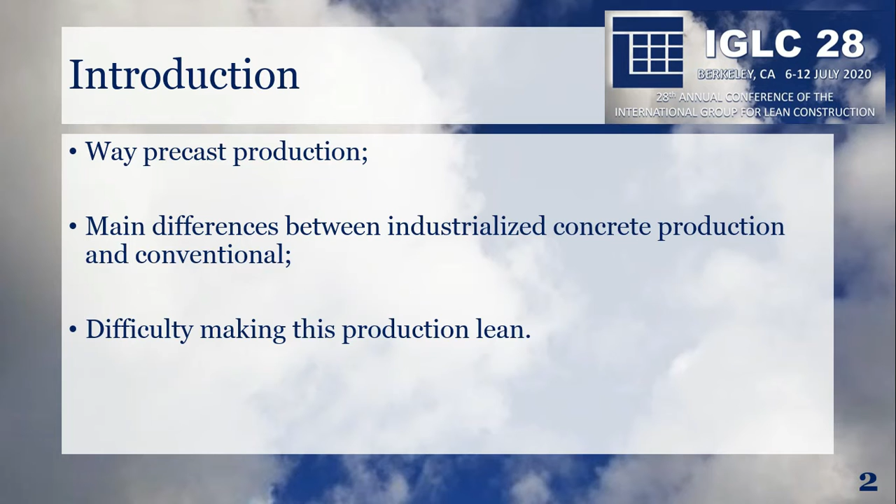This research was carried out as a case study in an industry of precast elements, Factory A, located in the state of São Paulo, Brazil, which has an installed capacity of 5,300 cubic meters. At the time of the research, this factory was producing 4,000 cubic meters distributed in pillars, beams, and strutting beams as structural elements, solid closing panels, and custom parts. This company is characterized by the high adaptation of the types to meet any need for projects.

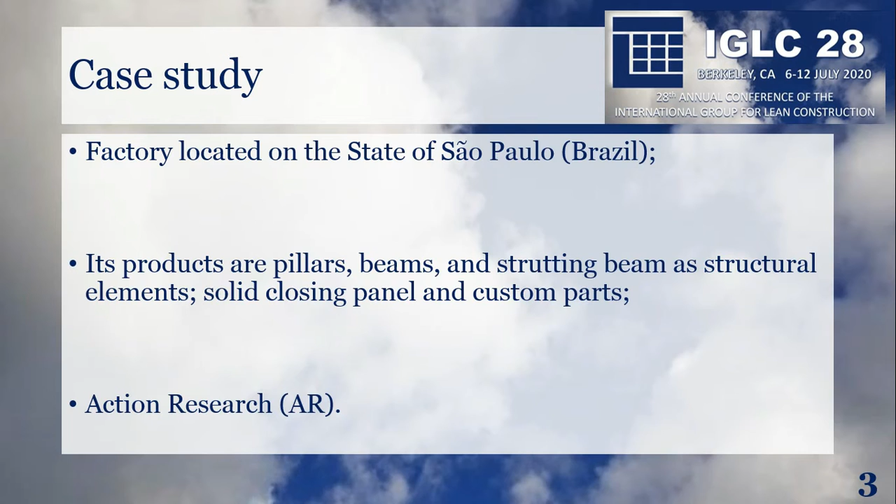Thus, an intervention was carried out through a master's research with an action research methodology, allowing the researchers and also the factory production coordinator to try to improve the process. Initially, it was proposed to study the production of prestressed beams. This production is carried out with a prestressing track.

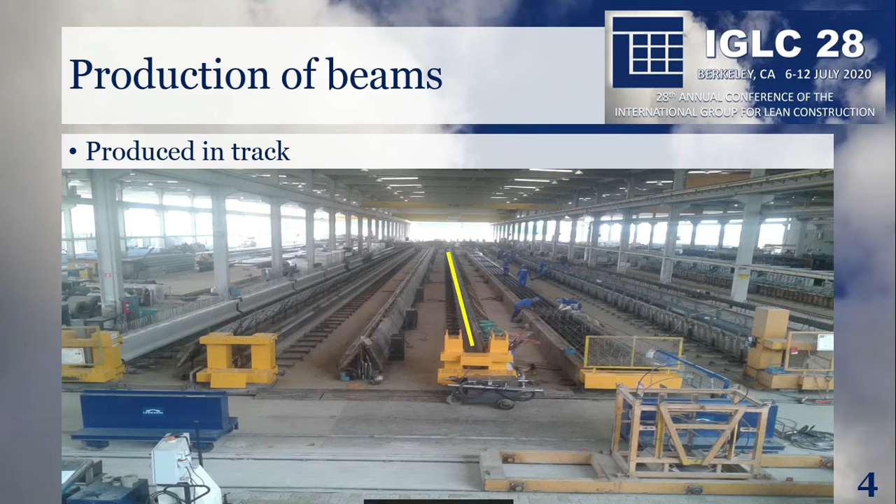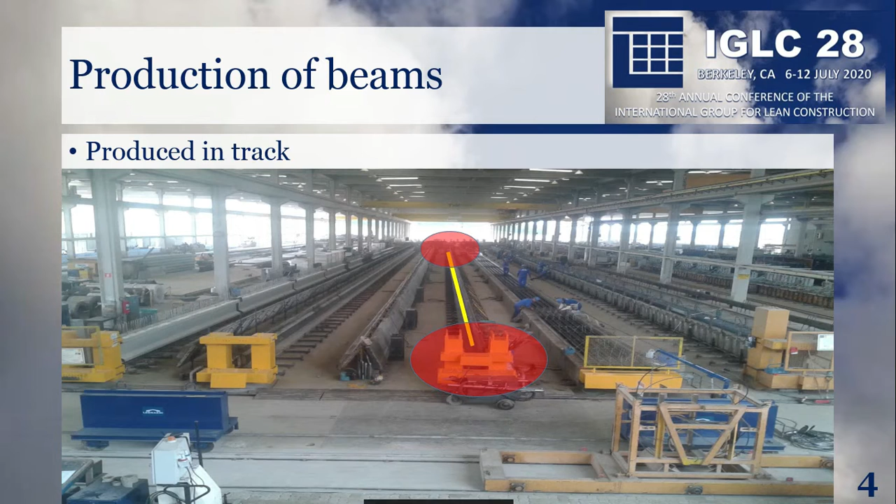This track is a region between two prestressing headboards. As you can see, one headboard in this picture at each line of this production track, and these are the active headboards, while the passive headboards are at the bottom. Between these headboards are the metal molds that serve to shape the beams, as being triple I or as being triple V. When carrying out production, it is necessary to pass the prestressed steel strands along the whole track.

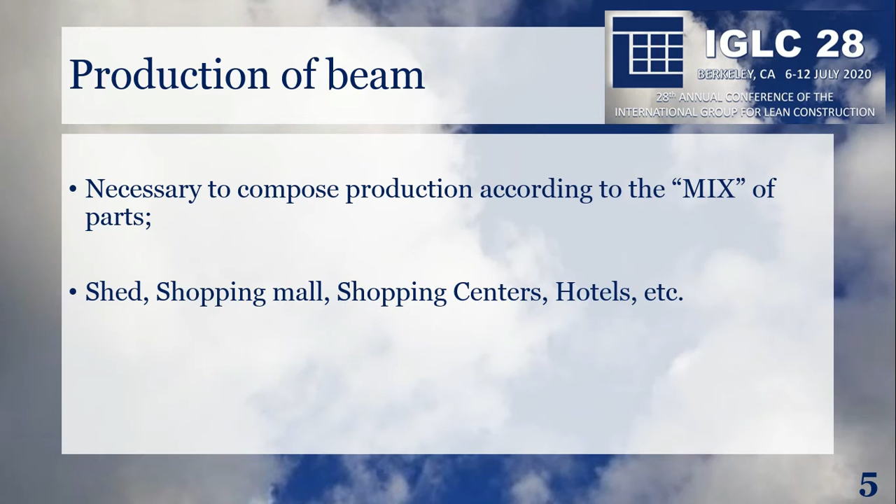Therefore, with the intention of making the best use of available resources, such as prestressed steel strands and the metallic molds, usually several beams are combined in the same track. As the factory builds works of warehouses, hospitals, shopping centers, hotels, and supermarkets using precast elements, the production of a beam in a shopping mall has a totally different complexity than a beam in a warehouse. With several works, it is necessary to produce according to the available mix. This mix varies with sales and generally interferes with workloads.

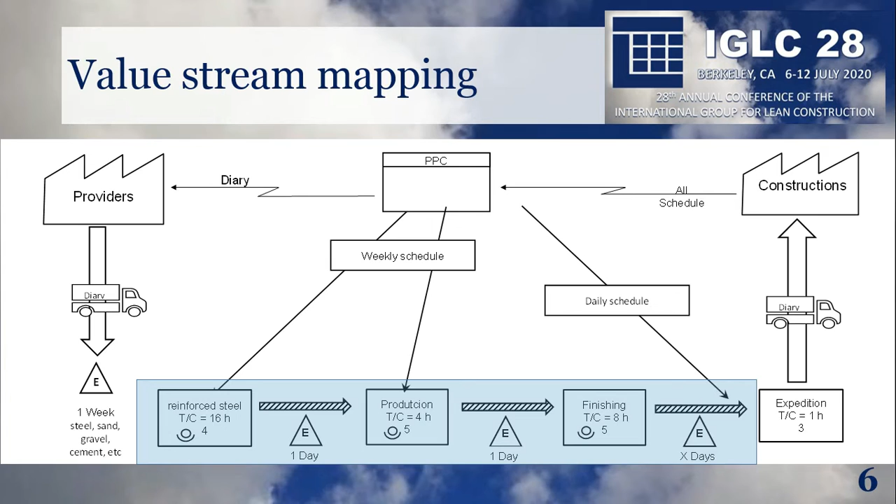One stage of the research was to develop a value stream map. On this slide, a simplification of the current VSM is shown. Production can be divided into three basic stages: reinforced steel, production, and finishing. A traditional production is perceived, with production planning and control having to program and reprogram production, with communication between processes, and with large stocks between processes.

As the production stage ends with concreting, the finishing team needs to wait for the part to cure, so that communication occurs in a FIFO flow. Looking at the VSM, we identify that it is necessary that the production process is stable. Firstly, consider the curing of the concrete. If the concreting is not carried out by the end of the day, the metal mold becomes unavailable for the next day, interfering in the production of the reinforced steel and the finishing.

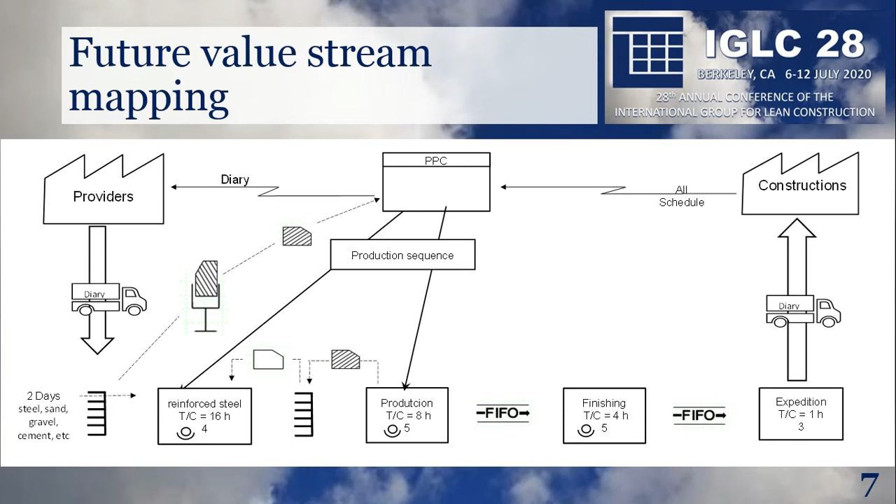This article proposed the impact on process stability caused by variations in typology. Stability is the reliability of the process in carrying out an activity with the same quality, duration, and methodology. The stability can be represented directly by the 4 M's. The material stability is found in its availability as needed.

The lack of material, difficulty to remove it, and/or low quality can cause interruptions in the development of an activity. In the work labor, to perform an activity, labor is required that does not vary in quantity and capacity, allowing for constant quality and duration.

The stable process needs your workforce to show consistency in the execution of the methods and in the required quantity. This requires training and a low rate of absenteeism. The method must present a sequence of steps that can be replicated in such a way as to guarantee a standard duration and quality. A method must present production standards which serve as comparative parameters and as a basis for possible improvements.

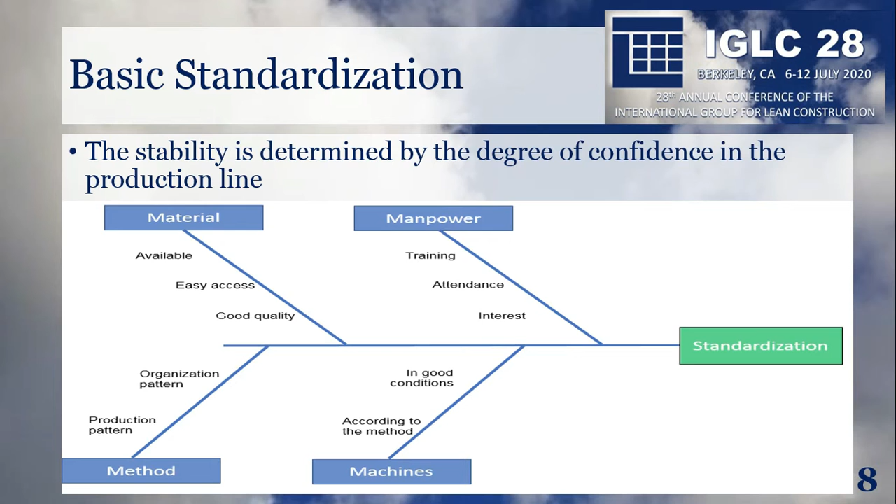Having defined the basic stability, we now have to check if the production stage is stable. First, it was necessary to divide a station into substations. Preparation, a stage that consists of cleaning the form, preparing the accessories, and positioning the reinforcing steel in the molds. Passage, to string prestressed steel through the reinforcing steel, and its specific protection.

These 3 substages were studied, and along the elaboration, adapted standard works were proposed. The stages were divided into small activities to be timed and evaluated. The steps were recorded photographically and a methodology was developed to be followed.

With the division of activities, it was possible to calculate the estimated time for each of the preparation, assembly, and close activities. For it, I observed 10 times the average of carrying out an activity, the number of employees that perform the activity, initial displacement, interference feature, and module of interference characteristic. What would this module be?

When the observation was carried out to close a metal mold, it is actually carried out to close 6 meters of track. As the track characteristic is provided in meters, it is necessary to divide the time by 6. If I record 1 minute to close a side, in fact we have spent 10 seconds per meter.

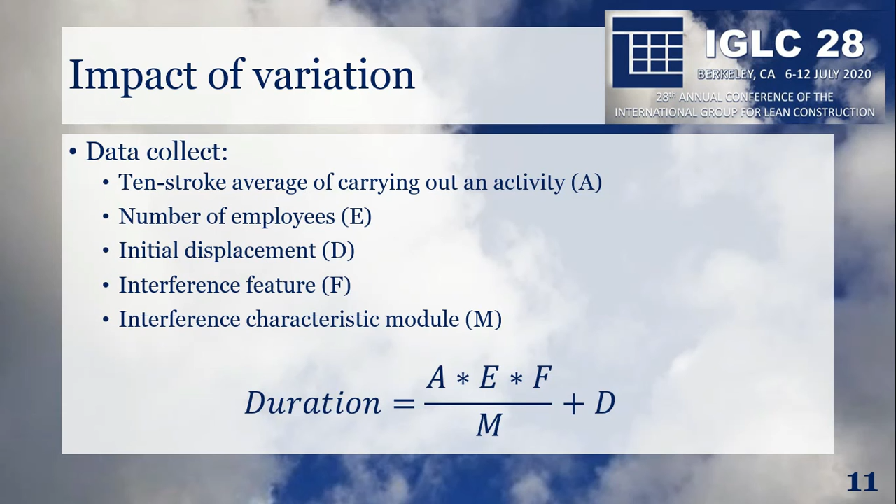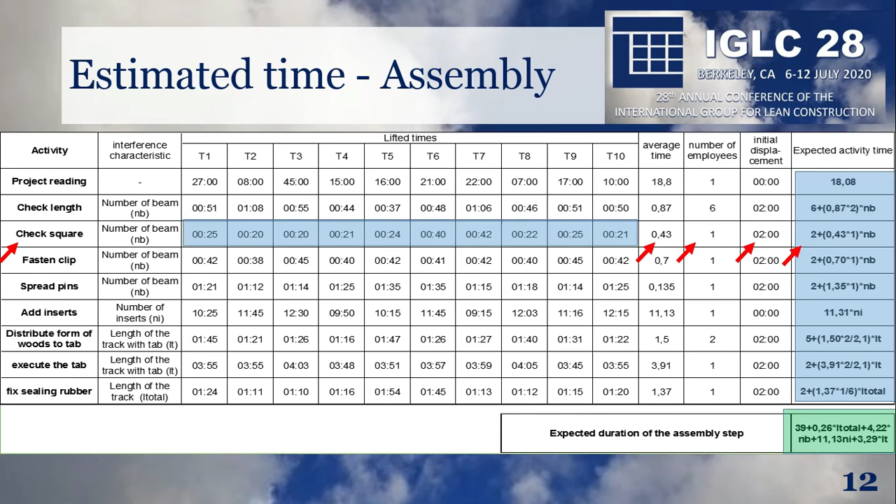So we have that the necessary time is equal to the number of employees times the average time divided by the module, plus the initial displacement. Therefore, this formula on the right is just the time spent on one activity, the activity of checking squares of the beams. A final formula for the estimated time for the assembly steps is the sum of all formulas on the right. In this way, it is possible to estimate production and improve scheduling.

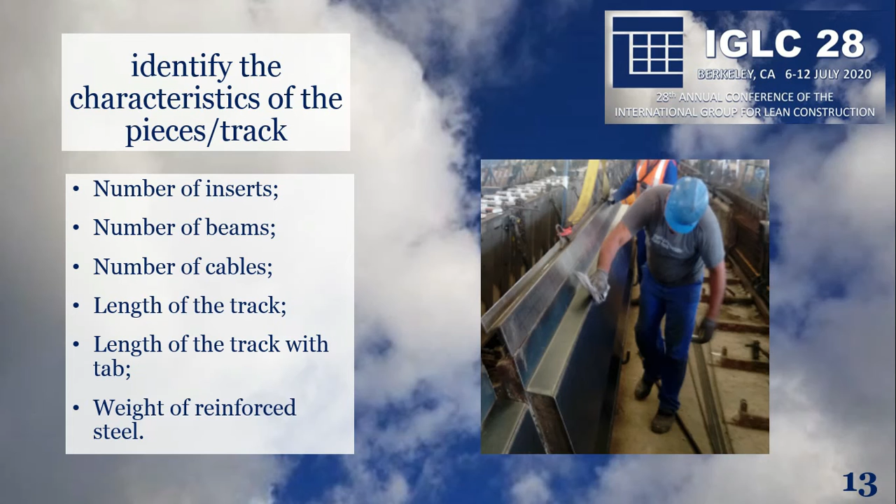Therefore, the time result is directly proportional to a characteristic, which can be number of inserts, number of accessories for various connections between precast parts or other production systems, such as metal roofs, cloths, or wood, number of beams, number of strings of prestressed steel, length of the track with tab. What is this tab? It is a specific assembly step that requires a long duration. In the wood step for connecting a capping piece, the tab serves as a frame for the hollow core slab in precast. Volume of concrete and weight of reinforced steel.

To allow us to verify the impact of the variation and to better understand the production families of Factory A, the characteristics of 18 production tracks were collected. These characteristics are listed in the table below. As you can see, no similarity was found between these tracks, which generates the following question: what is the likely impact of these changes of the typology?

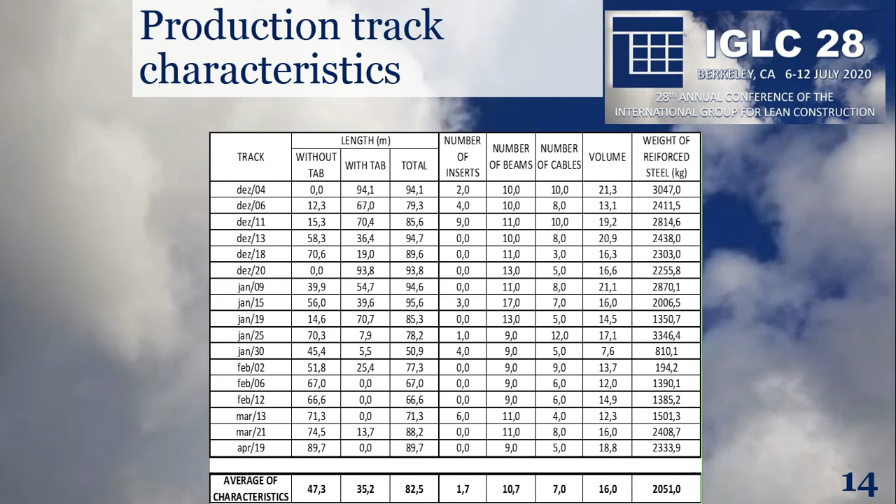Then the characteristics were compared with estimated time development formulas with the following dates. Each track occurred on a certain date, which is to the left of the table. These 3 columns are the estimated time for the 3 stages according to the checklist considered. It is noticed that a track in December, day 4, with tab, had a large impact in the assembly stage, with a variation level of 241% when compared to the estimated duration on 12 February. The close and preparation steps reached 44% and 24% variation, respectively.

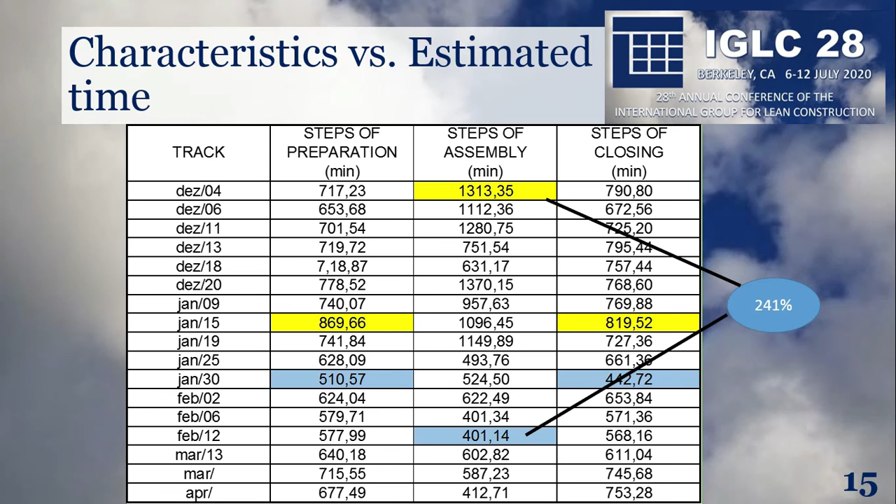As there is a great difference in complexity between the tracks, it is possible to verify the great difference in the duration of activities on each day. The last activity of the day is the concreting, thus allowing curing to take place on the counter shift. If you do not finish the track, forcing the concreting to take place only the next day, it interferes with the team's routine. First, and the main problem, the cure will occur through the day, preventing the use of the form. Second, as each day starts activities differently, there is no standard routine. This lack of routine directly interferes with production stability. Activities should always take place in the same way and time.

Third, as the complexity varies from track to track, it causes many programming failures. Fourth, when we analyze the future value stream map, the need for this process to be stable was identified. As this is not found, it makes it difficult to change the flow, since these oscillations interfere in the predecessor and later activities, reinforcement and finish respectively. This moment in the process is essential, as the stage is the main gear. This lack of timing interferes with the entire chain.

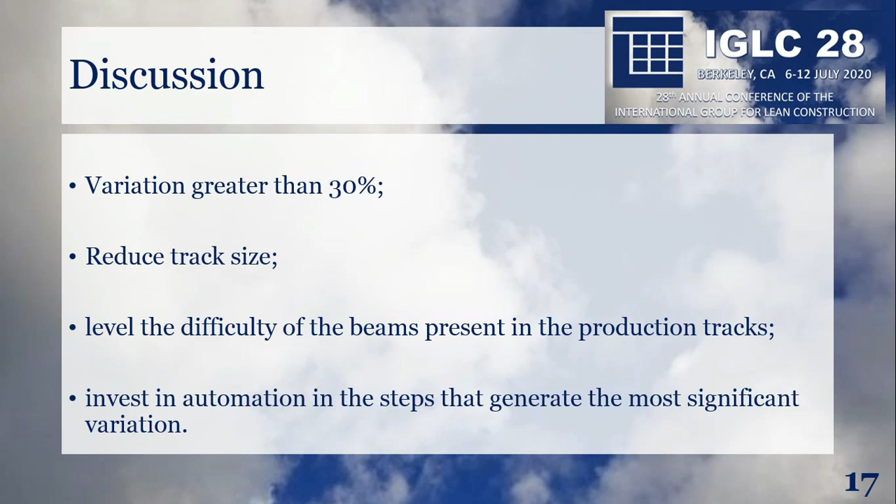Thus, a reduction in the size of the runway is proposed. As there is a great difference between the complexity of the pieces, it was suggested to divide them into 2 families. As the track has 100 meters, you can divide it into 2 tracks of 50 meters and better distribute the mix of typologies. It is also suggested to specify activities where larger variation in complexity was identified. You can invest in a specific automation.

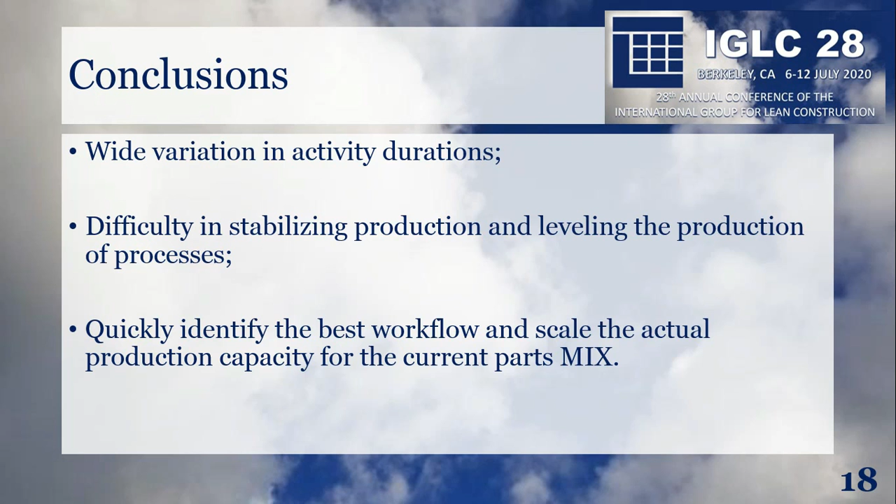In conclusion, there is a great variation in the typology, and it interferes directly in the production stability. Therefore, management finds difficulties in stabilizing production and leveling manpower, which makes the routine difficult. With this wide variation, every day there is a different flow and distribution of the ideal workforce. It is difficult for management to determine the best workflow and the actual suitable production capacity for the current mix of parts.